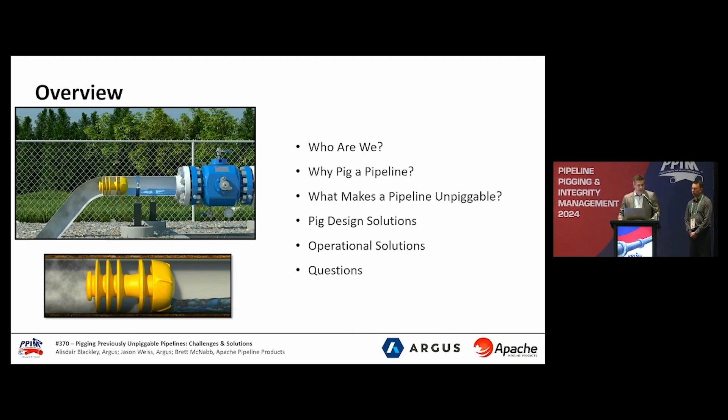Before that, I want to touch a little on the motivation for our paper. Brett and I, either ourselves or our companies, have attended PPIM for countless years and started to notice a bit of a drop in unpiggable pipelines focused towards inspection, which is fine. But also in our day jobs, we're noticing more and more time our companies are spending educating people on reasons to pig and what pigging is. As the industry's tribal knowledge fades away, we thought we'd take an opportunity here to share some of our experience. We hope the paper and presentation add to be a good resource for industry education, and some of the technical references we've cited in the paper will be useful for many applications.

So, a little about Brett and I. Brett is with Apache Products in Edmonton. Myself, I'm with Argus out of Edmonton. Not listed but mentioned is Alisdair Blackley. Alisdair is a co-author for our paper and instrumental in our presentation today, and is also with Argus as the manager of products engineering.

So, why pig a pipeline? For many of you this might be obvious, but for others in other areas of our industry, probably not so obvious. Certainly at this conference, the intensity of content on inspections is prevalent. In 2021, the Pipeline and Hazardous Materials Safety Administration, or PHMSA, along with the Department of Transportation, expanded the scope of safety and reporting requirements for more than 400,000 miles of previously unregulated gas gathering lines, through their final rule. Think about that - 400,000 miles of pipe on gathering lines, that's an incredibly large number.

Fortunately, through technological innovation and advancements, both from an infrastructure standpoint and from a smart pigging or ILI standpoint, pigging of these once unpiggable lines is certainly possible. Acknowledging the importance of inspection and inline smart pigs, our discussion from here will focus a little heavier on the need and benefits of cleaning pigs or utility pigs. From an operations standpoint, pigging can promote production optimization, corrosion mitigation, and many other benefits. Our industry needs to pig across their piping networks. The reasons are plentiful, and we believe they cannot be ignored.

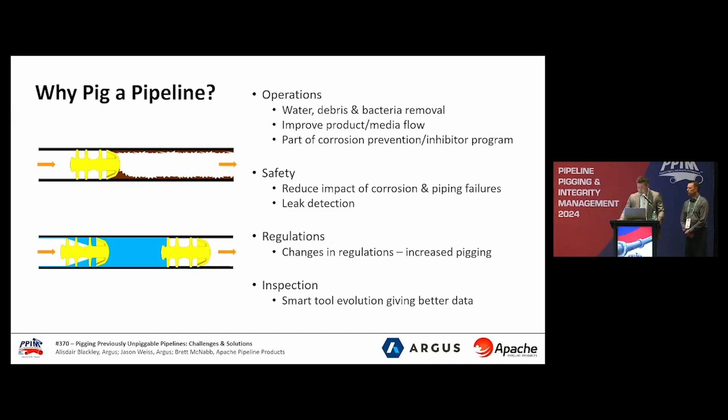So we're going to explore some of the more common reasons that piping and pipeline segments are unpiggable. These reasons can include features or components of the pipeline, even things as prolific as not having the ability to send and receive pigs - so no launching or receiving infrastructure. From there, environmental considerations due to the venting or depressurization linked with pigging. After that, we want to talk about something a little less on the hit list, and introduce the concept of economic feasibility when pigging. What we're seeing is that economic feasibility in itself, for some applications, is making otherwise piggable pipelines unpiggable.

At this point I'm going to turn it over to Brett, and he's going to walk through some varying aspects of the importance of pipeline design and geometry to ensure piggability.

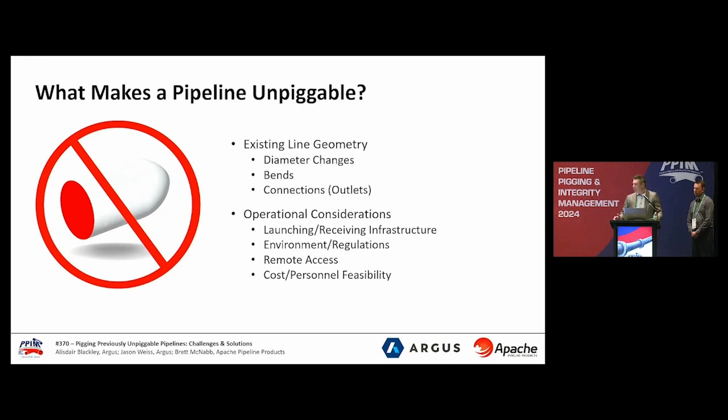Today we want to discuss what we feel is a very interesting topic, and that's unpiggable pipelines. I'll endeavor to walk you through some of the pipeline design elements that need to be considered when designing a pipeline pigging program. Diameter changes in pipelines can consist of wall thickness variations throughout the pipeline to account for under-the-road crossings. This can also be the case when steel and HDPE lines are fused at different intervals in the line. Pipelines can also consist of dual diameter line segments, which obviously pose a problem with pig selection and design. Having a pig too small will result in bypass and poor cleaning, with the pig getting hung up. Too large, the pig will get hung up and not be able to traverse the line at all.

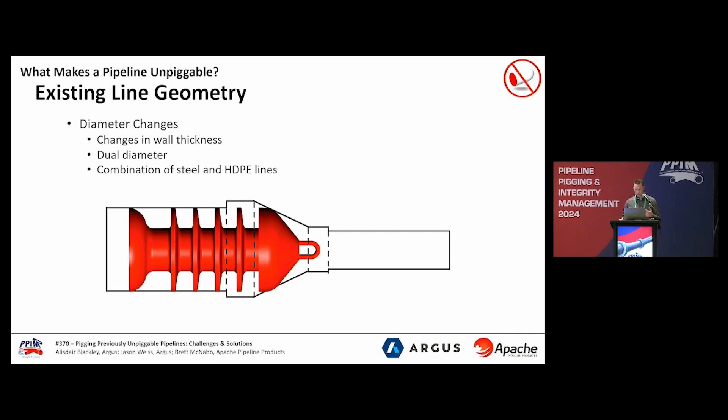The smallest bend radius we usually encounter for pigging is 1.5D, but there are rare occasions when we have noted 1D bends are present, which would result in damage to most standard pigging designs or the pipeline. 1D pipe bends are typically limited to being pigged using spherical pigs, which have limited effectiveness depending on the application.

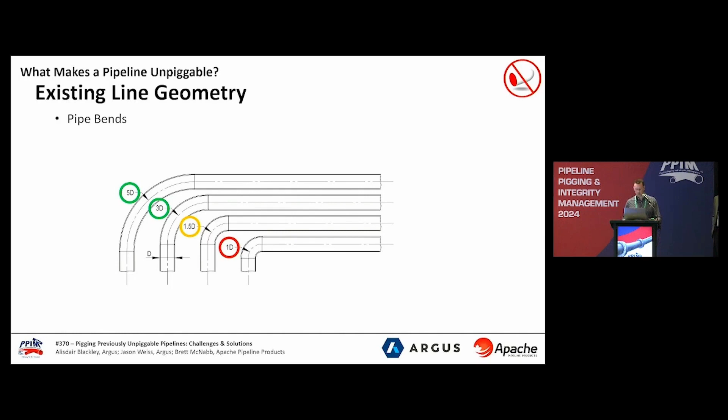The visual on this slide is intended to illustrate an engineered 3D pipeline pig trying to traverse a 1.5D bend, and the obvious issues that the pig will face trying to navigate and negotiate that bend.

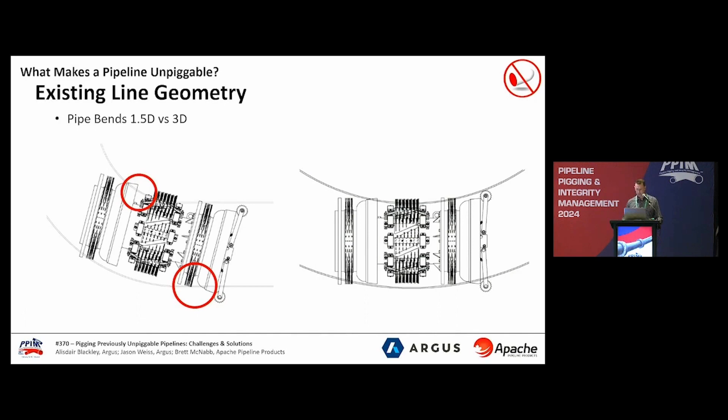Various piping connections, including inlets and outlets, can also lead to geometry that can cause a pig to stall or become stuck, creating an unpiggable pipeline. Shown in the images is a spherical pig failing to navigate both a full-sized and reduced unbarred tee. As flow bypasses, the pig can easily become stalled or inadvertently go down a different outlet.

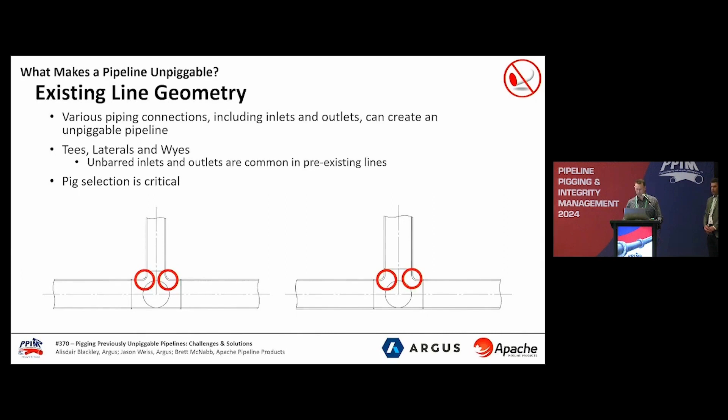This slide was added to showcase the pitfalls of improper pig selection as the foam pig is sucked into an unintended outlet. I'll pass it back to Jason and he can discuss existing infrastructure challenges that we may face. Jason?

So the need to pig pipelines that were historically not pigged arises from several factors. We've touched on some of them. The importance for regular maintenance, inspection, and cleaning of all pipeline types is more understood now. Couple that with increasing and new regulations aimed at reducing environmental impact of line breaks, venting, high-profile safety incidents, and the inspection required now for aging infrastructure.

We can also factor in liquid condensate. Produced at the wellhead, this is increasingly growing in demand and value, and it's probably the value that's linked to the demand. The need to sweep these liquids within the pipeline has emerged and is growing. All of these changes and evolutions have resulted in the need for pigging lines that were never intended or designed for pigging. This requires operators to consider various alternatives to update or modify their existing infrastructure.

We've established our industry requires more pigging, but how? Access to the inside of the pipeline is ultimately required to facilitate the insertion and subsequent removal of pipeline pigs. Traditionally, a conventional barrel-style pig launcher or receiver has been employed.

So pipelines and piping systems previously not designed to be pigged generally don't have the provisions for such large infrastructure. As seen, these types of infrastructure require a sizable consideration. It's not only the space required to retrofit the line, but the upfront costs can be significant. Other considerations such as ease of operation, safety, site accessibility, and environmental impact are also required.

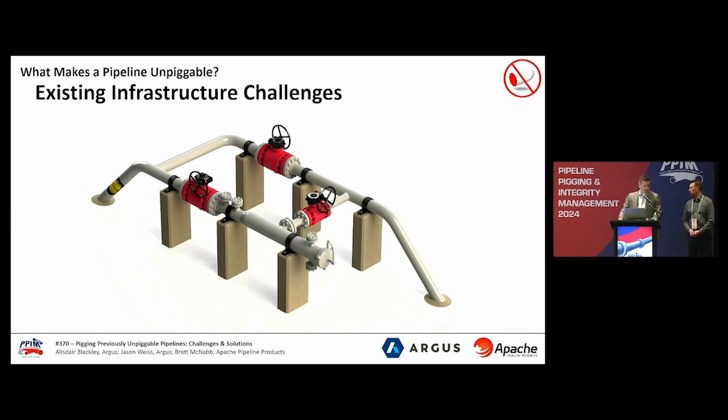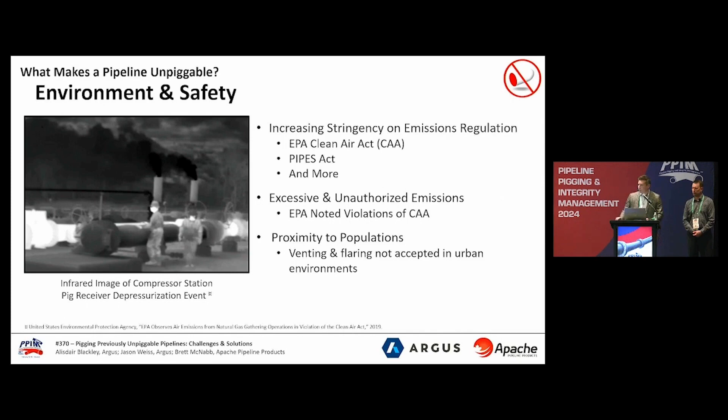In other instances, we've worked with end users who the proximity of their pigging location was a challenge. In one case, it was a sensitive environmental area, sour service, and in another case, strictly the close proximity to residences or farmhouses. In both those examples, it limits their ability to pig and certainly decreases the frequency of the pigging runs.

So what about location? Can the remoteness of well sites and infrastructure make piggable lines unpiggable? Does cost feasibility make these same piggable pipelines now unpiggable? It certainly can. Let's consider a couple of examples.

In the first one, a large Canadian gas gathering and processing company with a facility in northeastern British Columbia, their liquids-rich media require pigging once a day.

The challenge for them is their launching facility is remote. It's 3 hours away with no other pigging in that area, and that's 3 hours one way. So imagine the costs involved when you factor in labor of operators and personnel, trucks, overhead. Do you still send that pig?

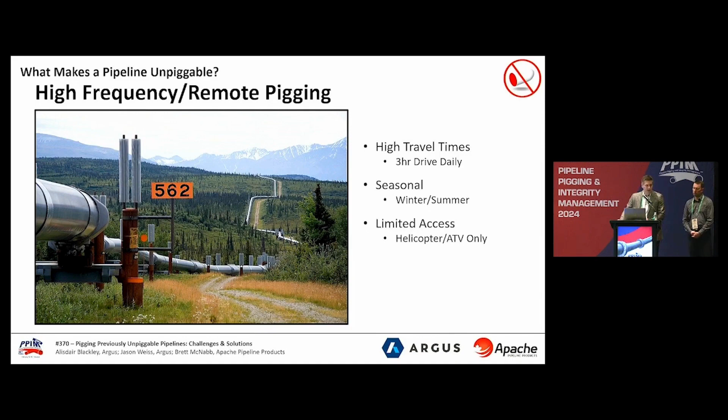That seems maybe like an extreme example, but similar examples are very common. In the US, producers in the Bakken are pigging up to 5 or 7 times a day to manage their prolific liquids production. Imagine the costs needed to justify the feasibility of that pigging program.

We'll look at another example. In this case, challenging access is seasonal. In the wintertime in northern Alberta, road access to launch a pig is not in question. But in the summertime, the only access to well sites is by helicopter.

In this image, the helicopter pilot is in fact the well operator. They would load pigs in the morning and fly to as many of these remote locations as they could just to send pigs. Again, the prolific liquids was too much for downstream processing facilities, requiring them to pig every second day. As you can imagine, the costs were excessive.

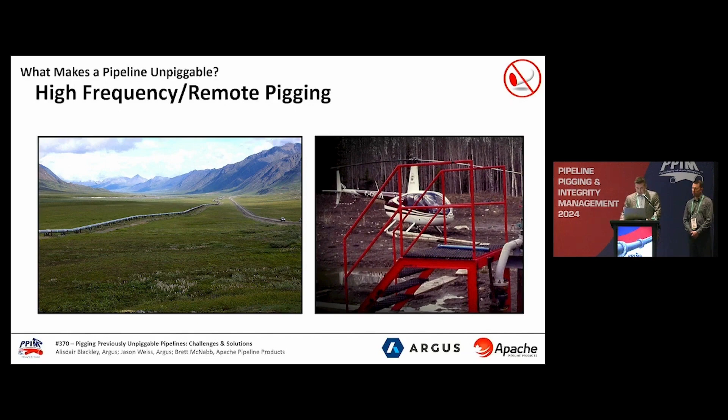What we're proposing is that even if your design features of the pipeline, which Brett has highlighted, are piggable and proper infrastructure is in place, meaning you can send and receive pigs, there's still a challenge in piggable pipelines from a cost perspective. More innovative solutions are required.

We've identified the problem, but how big is the problem? Is it actually a problem? Before Brett takes us through some features which can be implemented to pigs to help convert unpiggable lines to piggable, we wanted to showcase some statistics. It's hard to be entirely accurate with an estimate, but generally within the industry, it's agreed that 40% of the world's piping and pipeline infrastructure is currently unpiggable.

So we're going to go back to Brett, and he's going to share some of the things you can do just with pig design to help traverse these pipeline challenges.

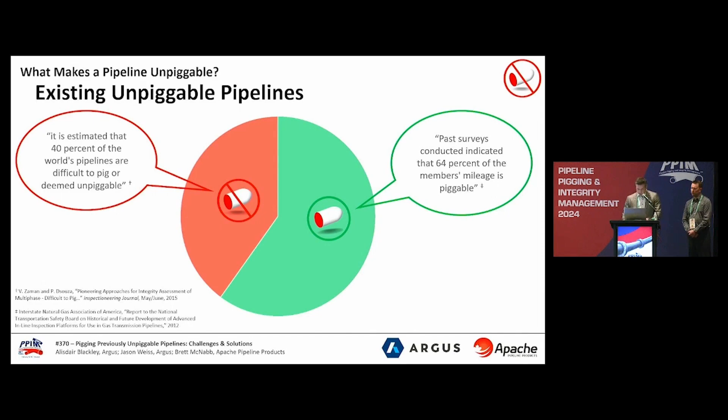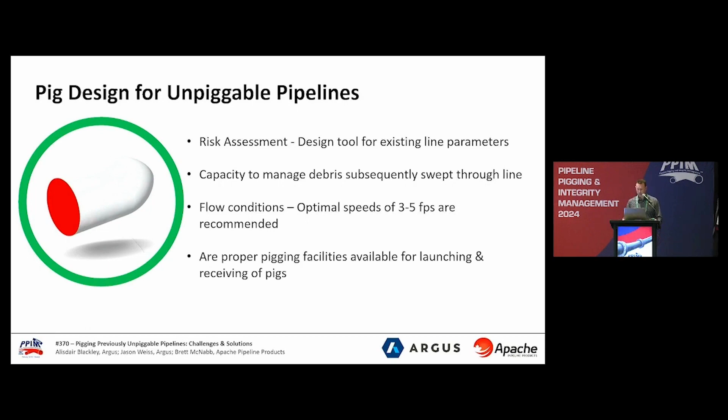Thanks, Jason. Challenges are now behind us. It's time for some solutions. When setting up any new pigging integrity program, it should always start with a risk assessment that includes but is not limited to capacity to manage debris, flow conditions, and proper pigging facilities for launching and receiving the pig, obviously.

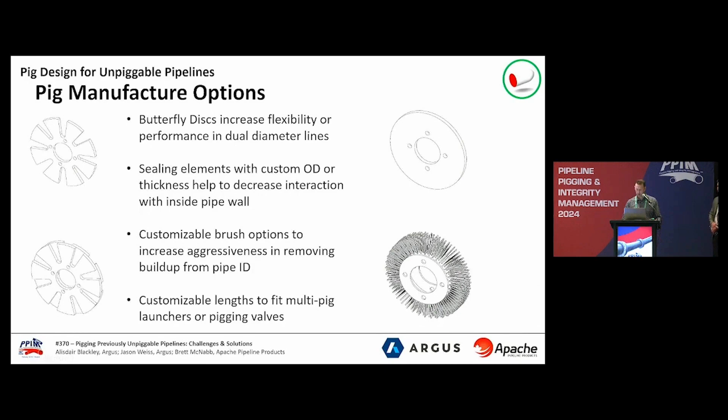Many different pig designs or customizations can be done by a pig manufacturer to combat the challenges presented in unpiggable pipelines. Some examples are butterfly discs, which provide more flexibility to navigate dual diameter lines, custom OD, ID, and thickness of all the sealing elements for specific applications, and different brush options such as standard wire, pencil, or nylon brush with varying trim lengths. Finally, overall lengths can be customized to navigate difficult piping features as well as to fit in various pig senders and receivers, including multi-launchers and pigging valves.

Diameter changes are very common challenges that can be solved with multi-diameter tools that can handle the changes in wall thicknesses present in a line as well as transitions from standard steel to HDPE as an example.

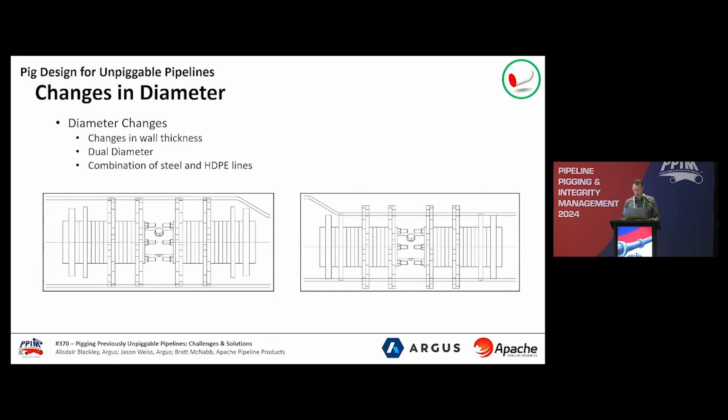Multi-diameter piping can be a complex issue for pigging. Pig selection is key and requires an understanding of the pig geometry and piping geometry. The image shows the same pig in both a large and small diameter section of the line. The discs sized for the larger section on the left will collapse through the diameter transition, using the smaller sized discs in the reduced section as shown on the right.

We have two separate case studies listed in this slide that speak to the challenges and successful completion of pigging runs involving a 34-inch to 36-inch transition in diameter. These pigs consisted of a combination of both 34 and 36-inch elements, as well as brushes, to allow a tight seal in both diameters of the line. This was done with a company, Enbridge, out of Canada.

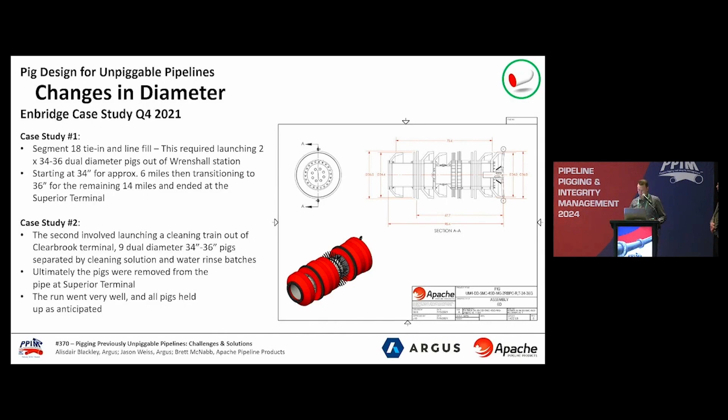Pig length, as mentioned previously, needs to be considered in the risk assessment process to ensure the pig always has a tight seal, even when navigating unbarred outlets. The durometer, or hardness, of urethane pigs can be increased to provide increased rigidity to traverse unbarred tees and enable more aggressive cleaning. Additionally, the durometer can be decreased when higher flexibility is desired, allowing for tighter bends or decreased pipe IDs.

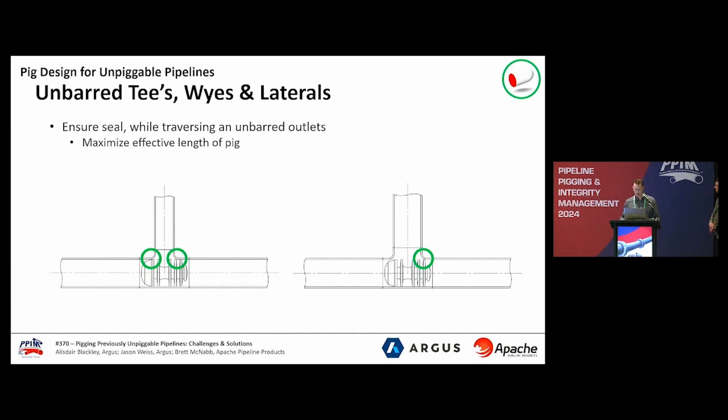In the case of a steel mandrel pig, additional factors beyond urethane hardness need to be considered to ensure successful pig navigation. The figure on the left presents an engineered 3D tool trying to navigate a 1.5D bend, versus the image on the right, which showcases a very similar pig with some slight modifications to the design, now allowing it to become a 1.5D tool and successfully traverse the 1.5D bend with no issue.

Now Jason will speak to some of the operational solutions for unpiggable pipelines.

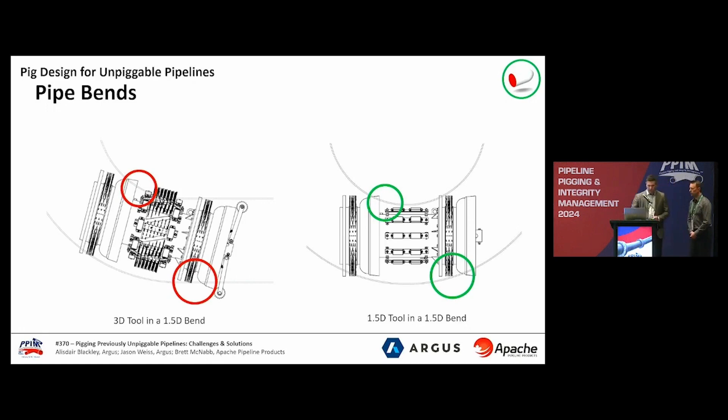Listed on the slide is an overview of some of the operational considerations we've discussed that challenge operators to ensure pipelines are piggable. Now we're going to highlight a few of the solutions.

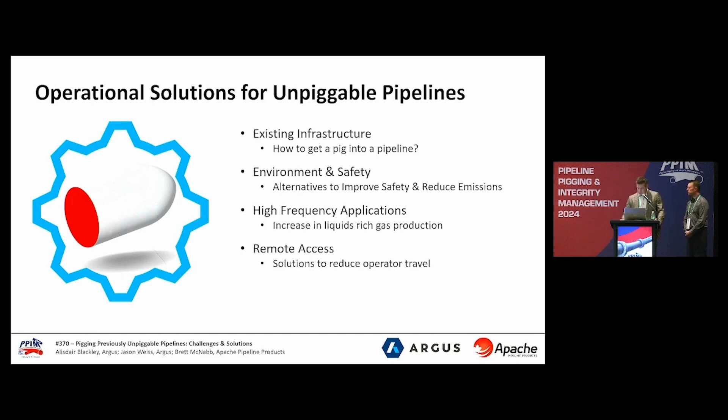The most common method within industry to send and receive pigs is the conventional pig launcher receiver. These have been around since really the beginning of pigging and have many pros and cons. This technology is presented today in our paper as both a challenge and a solution to making pipelines piggable. The large footprint makes modifications to existing unpiggable lines very challenging, and the negative environmental impact associated with the technology is becoming an additional consideration and even a larger problem.

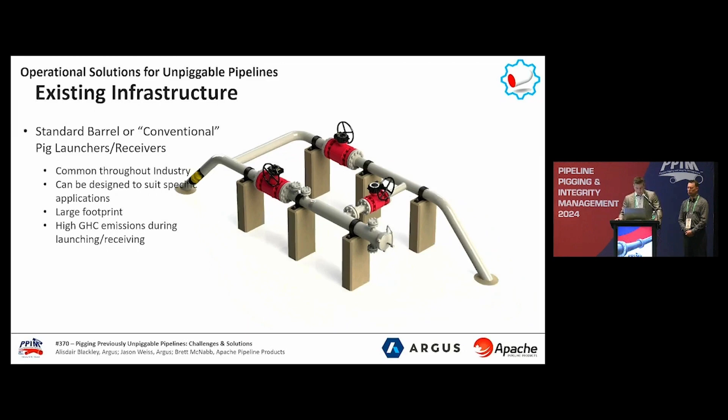As an alternative, pigging ball valves, or pig valves, illustrated here, would be an alternative to conventional pig launchers and receivers. Though primarily used for cleaning pigs, innovative advancements in inline inspection tools with smart pig manufacturers have seen pigging valves now used to send and receive intelligent pigs.

To date, there are several ILI pigging companies which have used pig valves to send and receive smart tools used for MFL, ultrasonic, eddy current when mapping is required, and of course leak detection. Within gathering networks, the need for extensive pigging facilities to send and receive ILI tools or cleaning pigs is significantly reduced, or even eliminated entirely.

As environmental sustainability and prominence gains, emissions reduction becomes critical in pigging operations. This involves minimizing the environmental impact of all pigging activity, updating infrastructure to reduce emissions associated with the launching and receiving of all types of pipeline pigs, and adhering to emissions regulations to ensure responsible and sustainable pipeline maintenance.

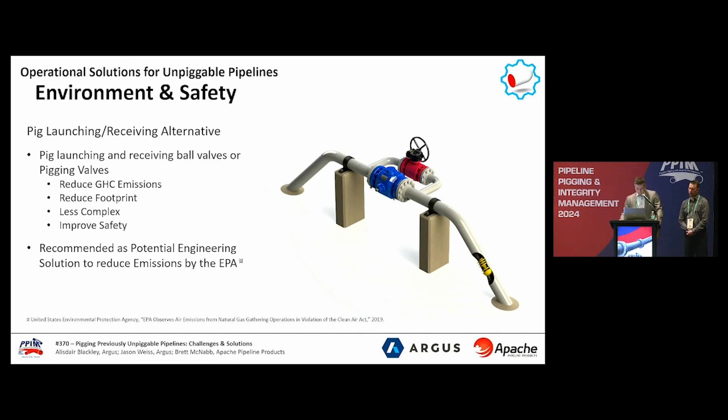We introduced cost feasibility as an obstacle, and two of the primary applications and arguments for this are challenges with the costs surrounding high-frequency pigging and liquids-rich applications, as well as remote access pigging.

Wet gas production, or production of gas with significant condensates, in North America has recently hit an all-time high. All forecasts are that this is going to increase, and the amount of piping with gas condensates is also going to increase. These natural gas condensates, when they fall out, accumulate in low-lying areas, such as river crossings, some road crossings, any low elevation piping. With the accumulation of those liquids, you reduce the cross-sectional area of the pipe, effectively choking your flow of natural gas. These liquids have to be removed.

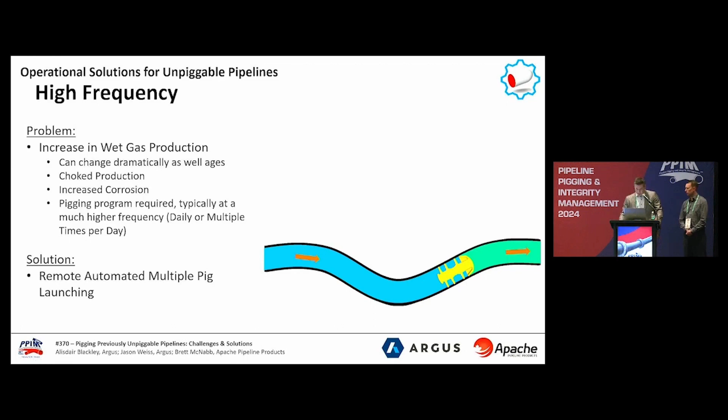As an operational solution to both challenges, automated and remote multiple pig launchers can prove to reduce costs associated with pigging considerably.

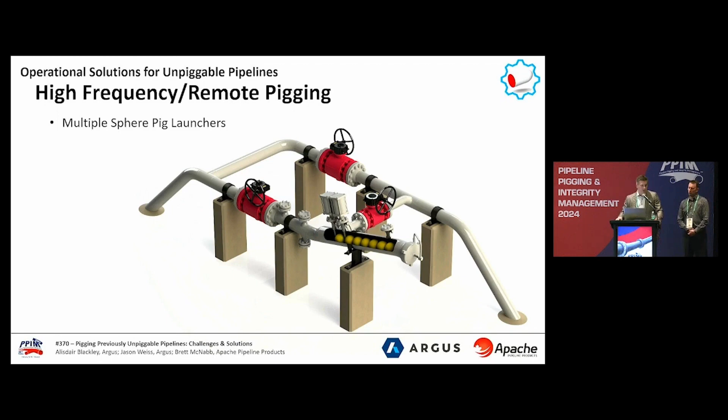Shown here is a typical spherical or ball pig automated launcher, which is configured to work remotely without operator intervention. Multiple pig launching significantly reduces pipeline emissions associated with pigging, as the barrel in this example is only vented once when you load the pigs, and not every time you pig, as in conventional barrels or launchers.

As an alternative, and when operators are looking for enhanced cleaning capabilities and increased liquid sweeping effectiveness not achieved by spherical or ball pigs, alternatives such as the vertical Argus-style multiple pig launcher can launch urethane cup and disc pigs remotely. This technology enables controlled and efficient pig launching while minimizing the need for extensive modifications to existing pipeline infrastructure. Automated multiple pig launchers provide additional solutions to operators challenged with the burden of remote or high-frequency pigging.

In this technology, you can load up to 11 pigs and then control them either automatically or manually from a remote location. No further human intervention is required.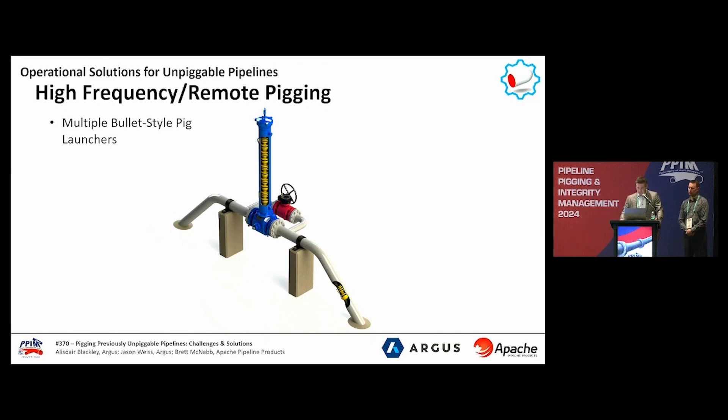Let's reflect back to the example with the helicopter. In this case, the gathering network was almost unpiggable just due to cost, especially in the summertime. Multiple pigging systems offer significant gains through reductions in associated operational costs, and, of course, decreased greenhouse gas emissions.

In closing, by understanding the complexities associated with pigging, pipeline operators and industry professionals can make informed decisions to effectively address the unique requirements of pigging previously unpiggable pipelines. This ensures the continued and safe transportation of vital fluids within our industry's infrastructure.